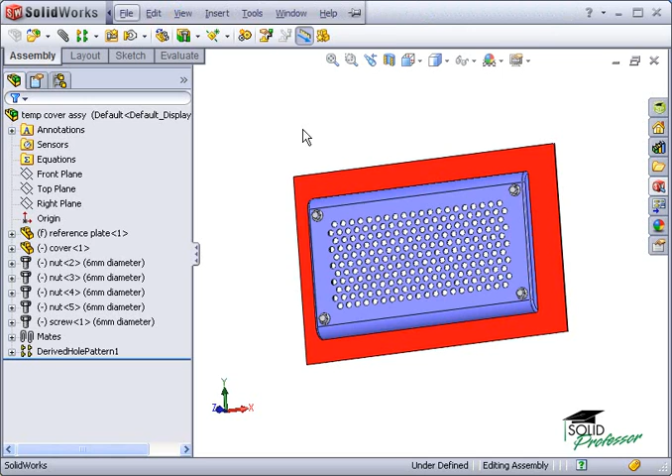Well, take a look at this assembly. I have a perforated cover mounted onto a plate with a corresponding cutout, all fastened together with screws and nuts. If this were a cover assembly I use frequently, it would be well worth converting it into a smart component. To do this, I'll select Make Smart Component from the Tools drop-down menu, or use the icon on the Assembly toolbar. In the Property Manager, I'll select the cover as the smart component.

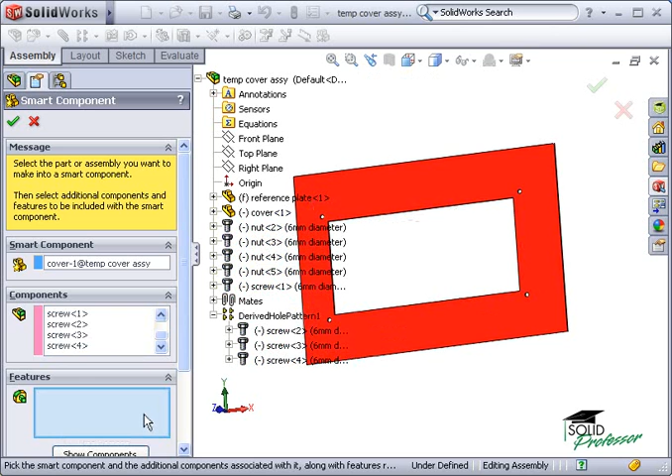In the Component Selection window, I'll select the screws and nuts. These selections can be made either in the Graphics area or from the Feature Manager tree. When I activate the Features Selection window, notice the components I've selected so far will become invisible. Now, this makes it easier to select features such as the cutout and the holes I have here. If you did want to see the components, just click the Show Components button and they'll come back.

I'll come back to the auto size option in a later example. For now, I'll click the Configurator Table button here at the bottom. This table lists the smart component, the cover in this case, as well as the other components you've selected. It allows you to specify which configuration of each component should be used with each configuration of the smart component.

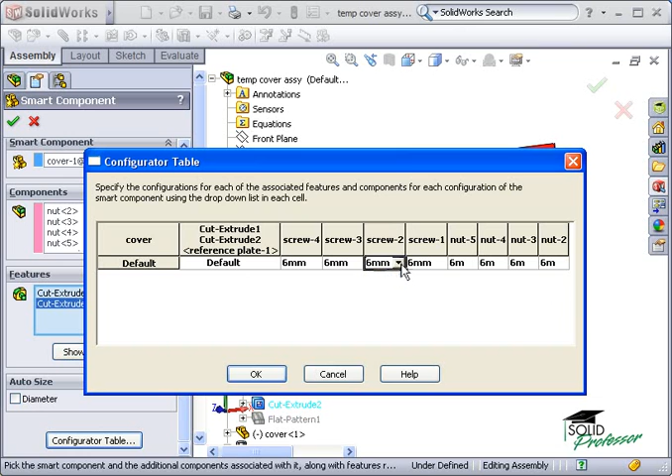I only have the default configuration for the cover, but this table can be quite powerful if your smart component requires different size hardware or size cutouts for each configuration. For now, I'll cancel this table and click OK to complete the smart component. At this point, there's little evidence that anything has happened. However, if you look at the Feature Manager tree, you'll see the icon next to the cover has changed.

If I right-click on it to open it, you can see a new folder was added to the Feature Manager tree called Smart Feature. Inside this folder are 3 other folders. One contains the features I selected, one contains the additional components, and the last one contains references necessary to properly position components in an assembly. An important detail here is that the smart component information resides within this part file, not at the assembly level. Once I save this part, the assembly I used to create it will no longer be required.

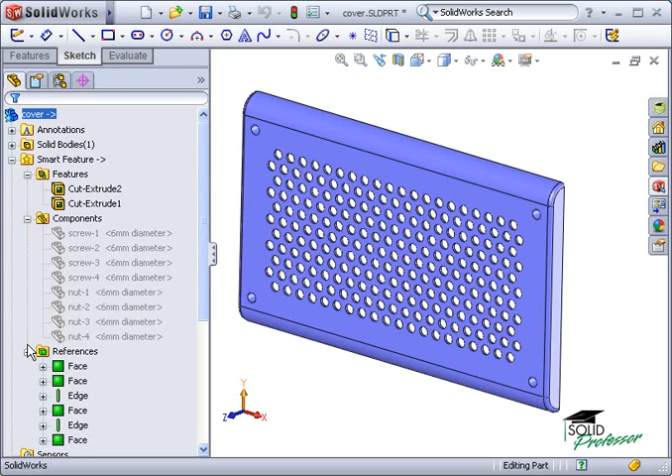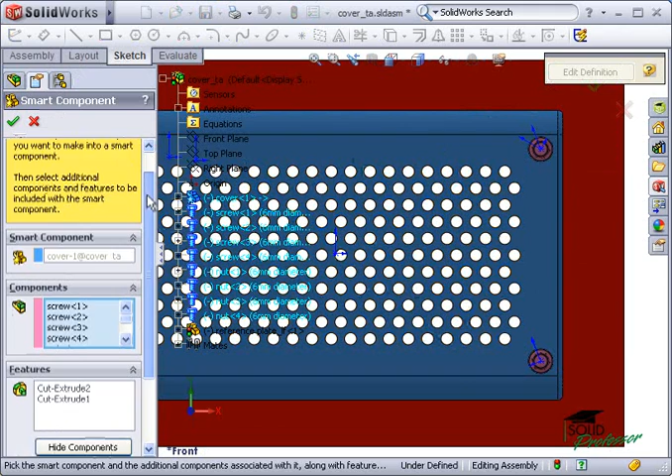If you need to make changes to a smart component, all you need to do is right-click the Smart Feature folder and select Edit in Defining Assembly. When you do this, SOLIDWORKS will create a new temporary assembly that is generated using the information contained within the smart component. Here you can edit the definition of the smart component by clicking the Edit Definition button to bring up the Smart Component Property Manager. Once you're done making changes, save and close the temporary assembly, and the changes will be updated and stored in the smart component.

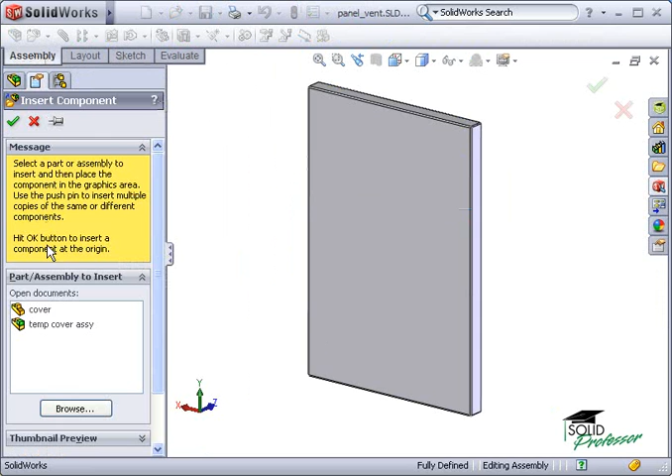Once you create a smart component, you can add it to any assembly just like a regular component. I'll add the cover smart component to this assembly, and I'll use mates as usual to position the cover.

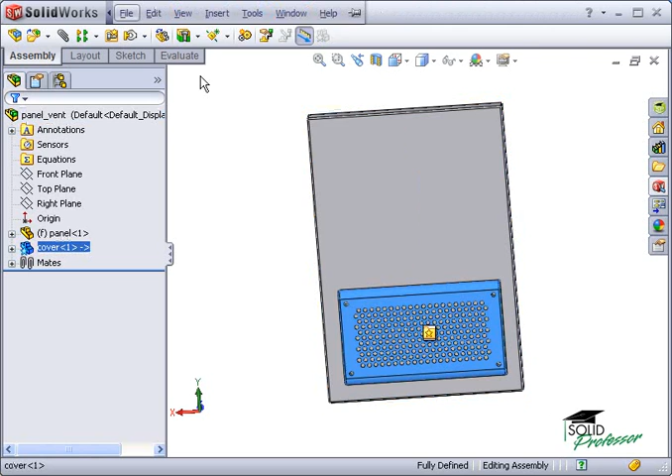To enable the smart features stored in this component, you can use the Insert drop-down menu and click Smart Features, or you can right-click the cover in the Graphics area and select Insert Smart Features. Or you can select the cover in the Feature Manager tree and click the star icon that shows up in the Graphics area. To complete the smart features, you simply have to satisfy the references shown in the References selection window. As you select each one, the preview window will show you the reference required.

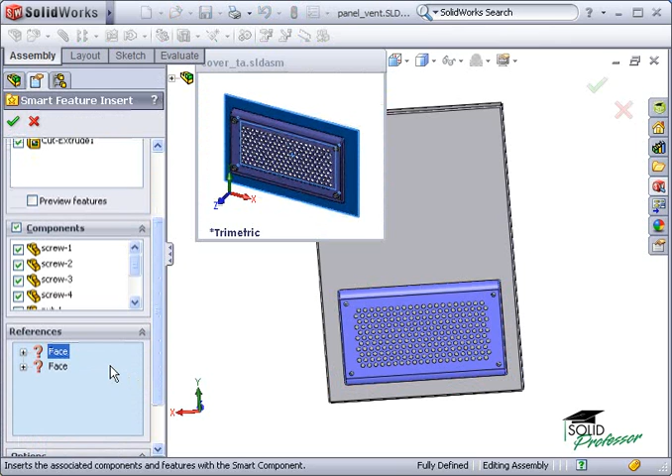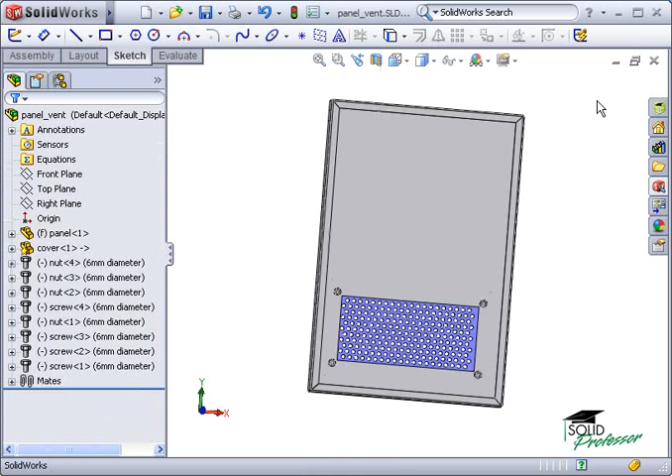In this case, I'll select the front of the panel for the first reference, and the back of the panel for the second reference. Once these are satisfied, you have one more option here at the bottom. This controls whether you wish to have features and components update if you were to move the smart component. I'll leave this unchecked and click OK to complete the smart features. You can see the screws, nuts, and necessary cuts were automatically generated.